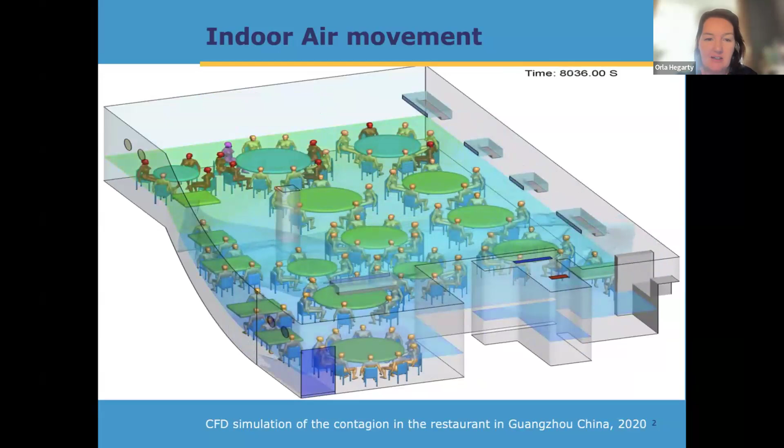This is an image simulation from a restaurant in China in 2020, where they tracked the people here, who you can see in red, who were infected with COVID during the course of this lunch. You'll see they're much more than 2 meters from the person who infected them. And it was modeled using the ventilation system and the air handling system in the building to track what the air movement would have been. And it mapped very closely with the people who were infected. So the first point I wanted to get across is that that is how air is moving.

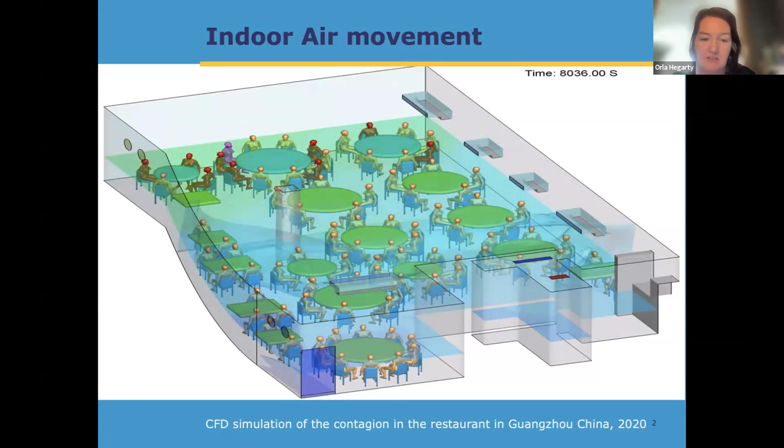This looks a little bit like a classroom as well as a restaurant. And so the issues around air quality, air movement, infection, pollutants in classrooms is much more than about proximity. It's about the air in the entire space and how often that is filtered or refreshed.

So apart from it being not a vacuum, air is more a soup, and it's a soup that we swim in all the time. If we think about a fish tank, it maybe gives us a better idea of what we breathe and what we move around in. We all know that if you don't refresh the water in a fish tank by replacing it with clean water, or you don't filter the water to remove things that are contaminating it, you very quickly will get cloudy water and you'll probably get diseased fish. So we understand that because we see it visually.

We can see the water becoming cloudy and dirty, but in indoor environments, we don't see that. We don't feel it, and humans are actually quite poor at perceiving that. Unless the air is maybe very warm or very humid, and we start to say it's stuffy or there are smells, we don't really perceive it. And particularly if we're in an air-conditioned environment where the humidity is being reduced and the air is being cooled, we perceive that as fresh air, and we don't think about what else is in that air.

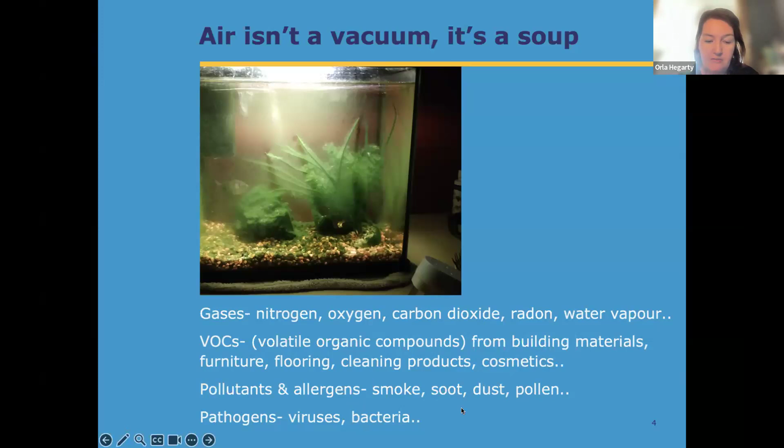And then, of course, we have the issue with disease spread from viruses and bacteria.

So this is nothing new. Buildings have been designed with the idea of adequate ventilation, fresh air and daylight for public health for a very long time. The earliest records I have found of monitoring air quality in schools are from the 1850s in American schoolhouses, when they were collecting indoor air in glass tubes and testing it for the quantity of carbon dioxide. Carbon dioxide has been used as a proxy to see how fresh the air is for nearly 200 years now. If we are exhaling carbon dioxide and it is being retained in the room, it's a good indicator that the air is not fresh, and it's something that's very easily measured.

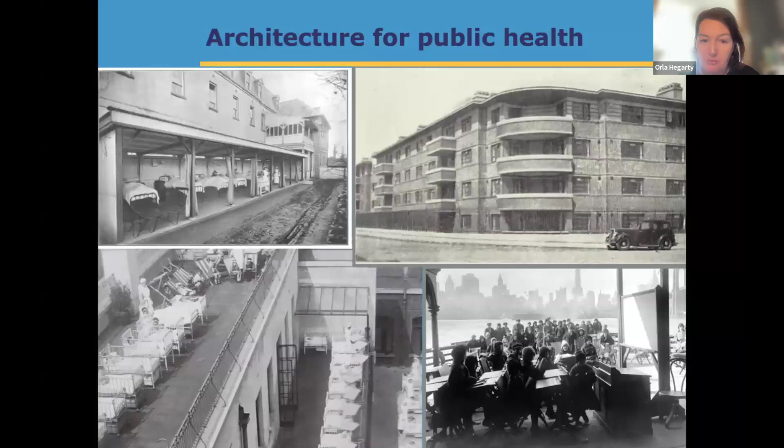This bottom image is from a school in New York during the Spanish flu around 1918-1919, when schools were kept open but moved outside. Even in very cold weather, children attended school, so that parents could go to work and to prevent the spread of illness. Following Spanish flu, there was a whole wave of outdoor school movement in Europe, where children were educated outside, and a lot of that was driven by public health. So it's not new.

But because we don't get extremes of too much bad winter, we don't tend to design our buildings for very cold weather. We tend to design our buildings for the temperate season from late spring until mid-late autumn, when we can naturally ventilate our buildings and they're comfortable. Therefore, we tend not to design for those short winter months when we seal up the buildings, try to retain heat, and have very poor indoor air quality. And that's why we talk about flu season - flu season is just a factor of how we design and manage our buildings.

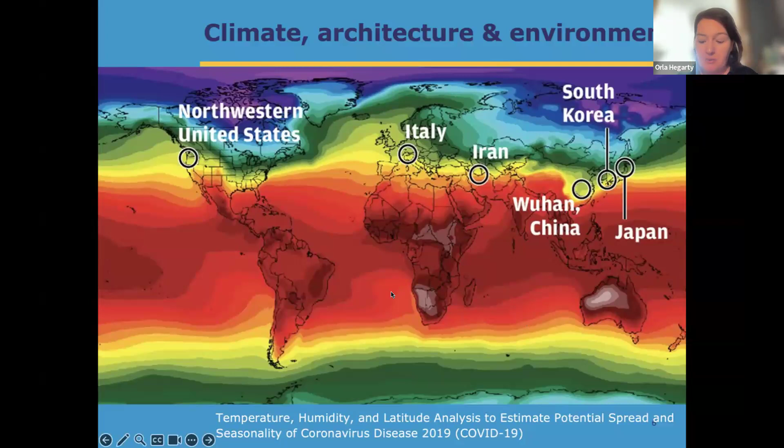Interestingly, six months later, when that yellow zone tipped into southern Australia, it was Melbourne that was badly hit - similar climate conditions, similar building design, similar issues, all measurable, all a factor of the environments that we live in.

If you track the northern United States, you see very high levels in spring and again in the heating season in autumn. But in the southern states, the peak is in summer months, and that's a factor of air conditioning. We now recirculate a lot of air for energy saving, so it feels fresh but isn't actually fresh air, and it can contain a lot of pollutants and pathogens that we don't perceive.

This is also the first airborne pandemic where we've had air conditioning, so the nature of spread has been quite different to, say, Spanish flu or TB. Air conditioning has only been around about 100 years and common in the last 50, particularly in vehicles, which I think is a big issue we're not talking about.

When I talk about climate conditions around the world and the pandemic, relative humidity becomes important, because we often design buildings worrying about high humidity risk, trying to prevent fungus growth and similar problems. But we need to be careful, because going for low humidity can impact human health. In the cold season, when we take outdoor air with high relative humidity and warm it up, it becomes very dry indoor air.

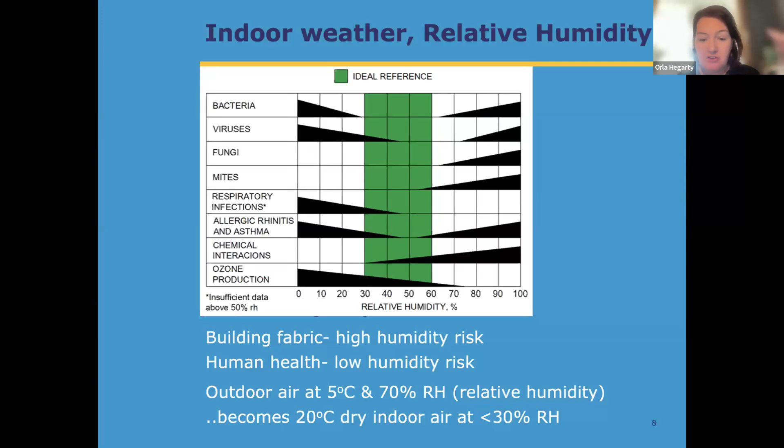This area is regulated, but we need to be careful, particularly since the 1970s oil crisis, because we've changed how we design buildings. All the learning from TB in Ireland's schools, around ventilation, cross ventilation, and high ceilings, has been forgotten over the last 50 years as we've moved toward under-designing buildings since the energy crisis. We've made them smaller with less engineering equipment, and you'll probably find the buildings with the worst indoor air conditions are from the 1980s, a reaction of under-engineering buildings and over-occupying them for cost savings.

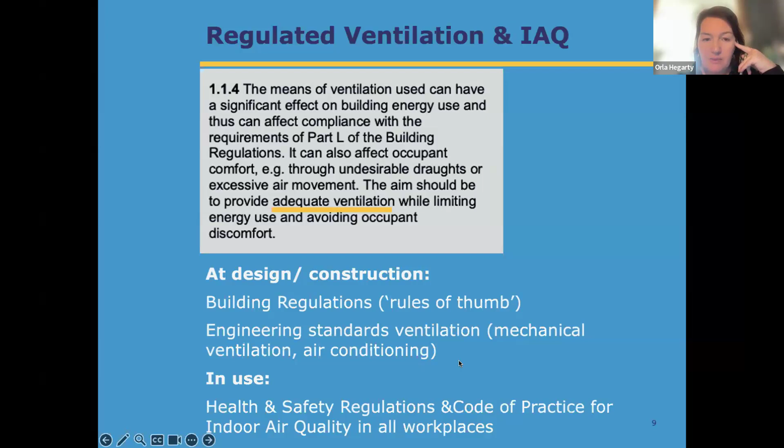So coming to conclusion, I think we need to remember that infection is not inevitable. Infection risk in all buildings can be measured, managed and mitigated. We do not need to be in a situation where we still have disease spread in buildings and vehicles through lack of people's knowledge and lack of monitoring. Public information is incredibly important in this area, because people will manage their own behaviour if they know the risks.

Schools have been particularly at the front line in all of this, because they're high occupancy buildings. Throughout the last 200 years, schools have been designed with the knowledge that they are high risk environments, because children don't just come in and spend an hour in a place of worship, or sit in low occupancy in an office or factory. They sit in high occupancy in these spaces, and stay there for long periods of time. They also tend to be doing activities like singing, talking and shouting, which produces more pathogens into the air.

So schools have always been recognised as core to community public health. There's a statistic from America that shows that in 2020-21, 70% of household infection came home with a child from school. So if you can make sure that schools have conditions of good public health and good air quality, that makes a very significant difference in terms of community public health and disease spread in communities.

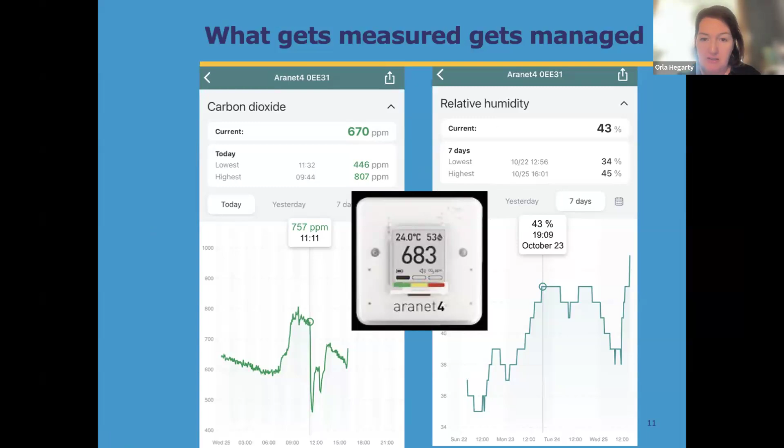And I think from my own measurements and moving around the place, things are not as bad as you might think. And certainly the issues are mostly in certain times of the year when we are cold and we stop ventilating our buildings adequately. So thank you very much. That's the end of my presentation.

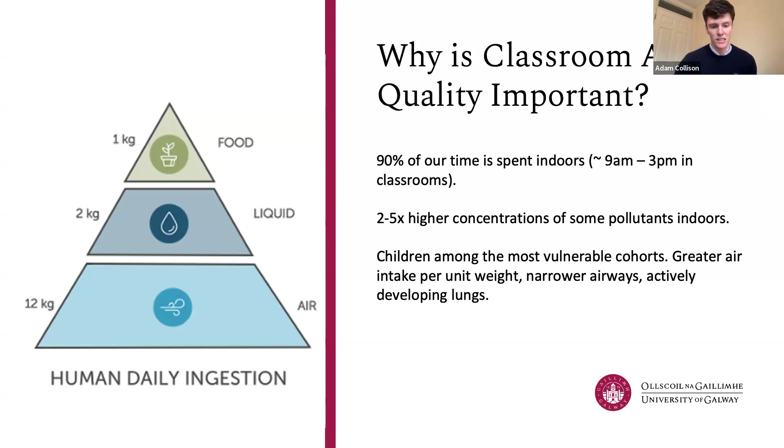So the Benefit Project, which I work on, focuses on 2 specific non-domestic building cohorts. The first group is offices and schools undergoing energy retrofits as part of the SEAI Public Sector Pathfinder program. This is my main research area, but we're also looking at newly energy efficient buildings too, so schools, offices and healthcare facilities. And I suppose why this is important is we all know there's a recognised need to reduce our carbon and greenhouse gas emissions.

The EU has introduced legally binding targets of around 30% in terms of energy efficiency by 2030. And given that buildings are the single largest energy consumer within the EU, accounting for about 40% of total energy consumption and a similar portion of our carbon emissions, addressing this will be an important thing.

But it's even more important, I suppose, given that in 2050, 80% of buildings that will exist already exist today. So retrofitting will play a major part in achieving any of these targets.

Having said that, the negative impacts on indoor air quality have been noted when energy measures are improperly implemented. But how do deep energy retrofits influence indoor air quality? Well, they can in a number of ways.

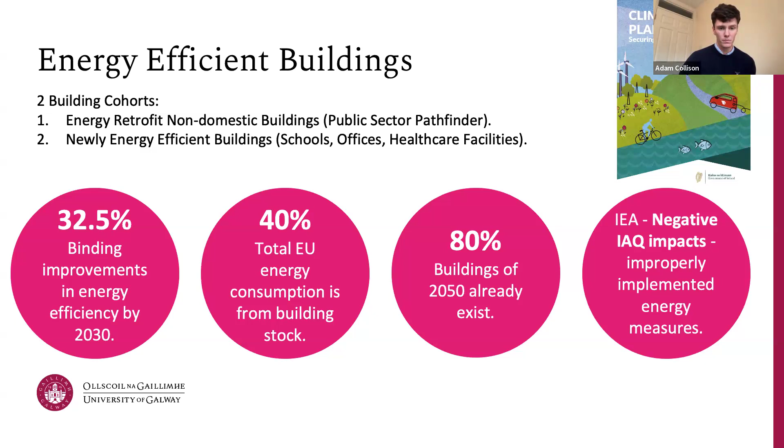But there is a bit of a gap in terms of non-domestic buildings, and more specifically classrooms. So as I mentioned earlier, I'm only going to discuss schools and classrooms today, but this is only a subsection of our project. So a little bit about the schools.

We selected a sample of schools which were very much representative of typical Irish classrooms, and all of these buildings were slated for retrofit. We visited just under 10 schools across the country during the 2023-24 academic year. Our sample was fairly well spread nationwide with a fairly uniform distribution between urban and rural areas. We had 8 primary schools, 1 post-primary school, and the buildings' ages ranged from the mid-1900s right up to the early 2000s.

Occupancy levels in the classrooms were typical, so about 27 to 28 children with an occupant density of about 2 square meters per child, which is actually a little bit more densely occupied than some of our European counterparts. Importantly, all these classrooms, as is common in Ireland, are naturally ventilated, meaning no mechanical units. Ventilation was all through passive means such as trickle vents, air bricks, wall vents, and of course window and door opening.

So we're carrying out a pre-post monitoring campaign, which allows a comparative analysis that enables us to capture the extent to which retrofit measures actually impact indoor air quality. We use research grade equipment to capture precise data on a variety of key air quality parameters of concern over a week-long period.

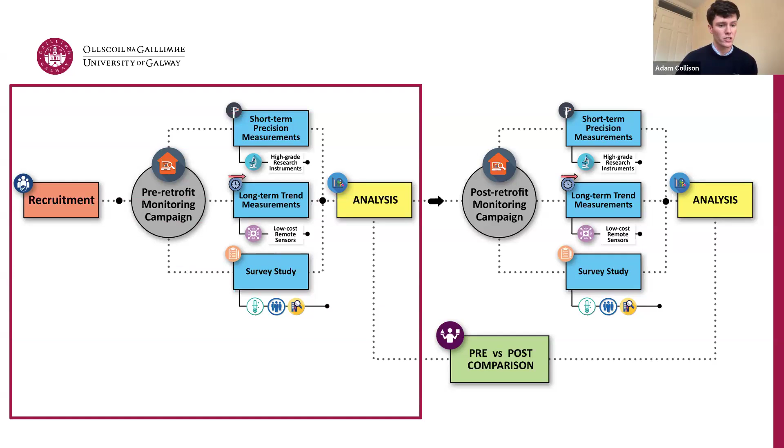And again, this is done both pre and post retrofit. So we've completed our pre-retrofit monitoring campaign and our post retrofit is ongoing. I'll share some of that pre-retrofit data shortly. So we measured quite a lot.

I think the first thing people think about when you talk about classroom air quality is a CO2 monitor, and the consensus at the minute is if you slap up a CO2 monitor, you can call it a day. But the reality of classroom air quality is a bit more nuanced. Yes, CO2 is a useful indicator for ventilation effectiveness and can serve as a proxy for human generated aerosols, but itself isn't actually a pollutant, and we shouldn't really fixate on carbon dioxide readings as a proxy for good overall air quality.

So our study took a broader approach by measuring several key pollutants, and I'll just run through some of the more critical ones very quickly.

Firstly, we monitored indoor particulate matter, airborne particulate matter of 2.5 microns or smaller, PM2.5. These particles are tiny and can get deep into our respiratory system and bloodstream, causing a whole host of health issues. They come from many sources, both indoor and outdoor. Indoor sources might be cooking, candle lighting, or a stove or open fireplace within a home, but those wouldn't be too common in the classroom environment. More problematic in classrooms is ingress of outdoor sources, such as vehicle emissions or solid fuel burning exhaust from chimneys, and also resuspension of settled particles from, say, carpeted floors.

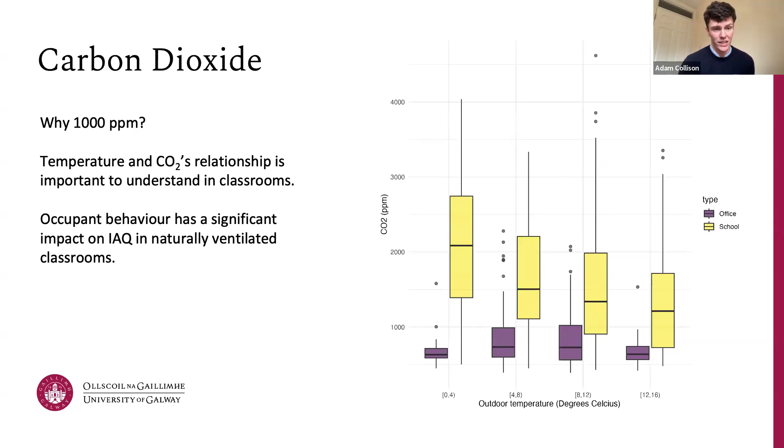So moving on then to PM 2.5. Again, it's another super important pollutant, especially in classrooms. And it poses a significant health risk by itself. It accounts for almost, I think, 60, maybe even more, 66, 67% of the harm from typical indoor air pollutants is just PM 2.5.

And the World Health Organization has guidelines. So the 24-hour guideline value for PM 2.5 is 15 micrograms per cubic meter. And we actually found that this 24-hour guideline value was exceeded on almost half of monitoring days within classrooms in the study. And further investigation by utilising the EPA's outdoor air quality monitoring network in the country, we found a strong positive correlation between outdoor PM 2.5 monitoring stations and classroom PM 2.5. Suggesting, I suppose, that ingress is one of the dominant factors influencing classroom PM concentrations.

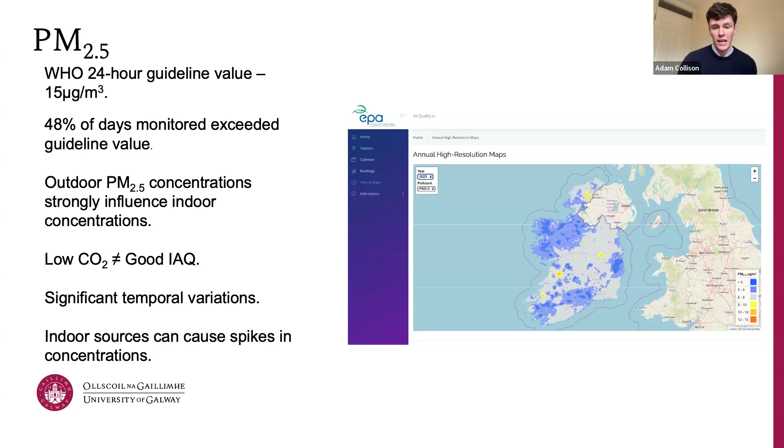And again, PM 2.5, given that the majority of the sources do seem to be outdoors, it's a good example of where low CO2 concentrations doesn't necessarily equate to good overall indoor air quality. So we could have a low CO2 reading because lots of fresh air is coming in, but if that air from outside has plenty of particulates in it, that low CO2 figure might be a bit misleading.

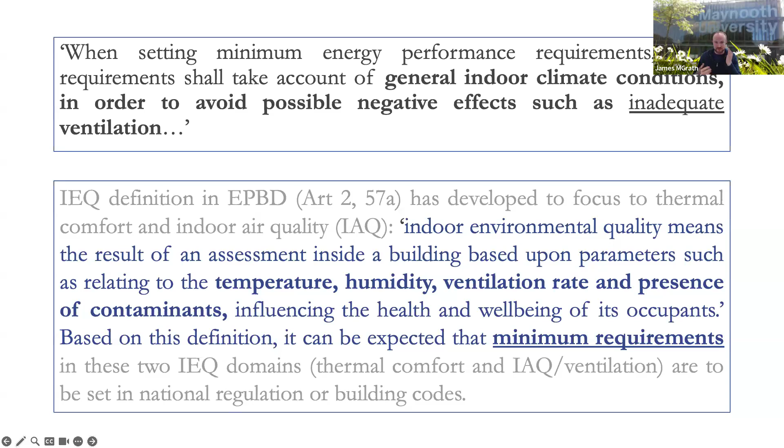But this is really set out more for ensuring minimum requirements and regulations. And if we often look, we see the word adequate, or sometimes inadequate. But I think we need to be looking beyond that. If somebody told me they went to a restaurant and it was adequate, I wouldn't be really keen to go back. Or if the teacher said the children's performance was adequate, as a parent, you'd be slightly concerned. You'd want to be doing better. I think we should be striving to do better, particularly with the indoor environmental quality in these environments.

So when we think of some of the current challenges associated with schools, there's various different requirements and aspects we need to be considering. Some are very much the climate targets and the decarbonisation, energy performance. But we're also now in an era where we can no longer be just looking at mitigation measures. We unfortunately need to start looking at adaptation measures as well. We know our climates are getting warmer due to the buildup of CO2. So we need to start building our schools not just to meet the mitigation requirements, but also adaptation, while also realizing that these are spaces for learning and prioritizing the health and comfort with multifunctional environments.

And particularly, schools have an occupancy of, for primary schools, say 9 to 3, secondary schools 9 to 4. So they're very different occupancy schedules compared to other larger offices and buildings, and particularly the residential environment. And we need to consider these factors as we're developing them.

So if we look at some of the broad evidence to date from an international perspective, we can see that a healthy environment, particularly the indoor air quality and environmental quality, is linked with student absenteeism. We also see when the environmental quality improves, the test scores improve and student learning improves, with increases of between 3 to 6% depending on the studies. Again, Adam touched on this, but the cohort of students, particularly in primary schools, are smaller. So the inhalation to mass ratios are significantly higher compared to adults.

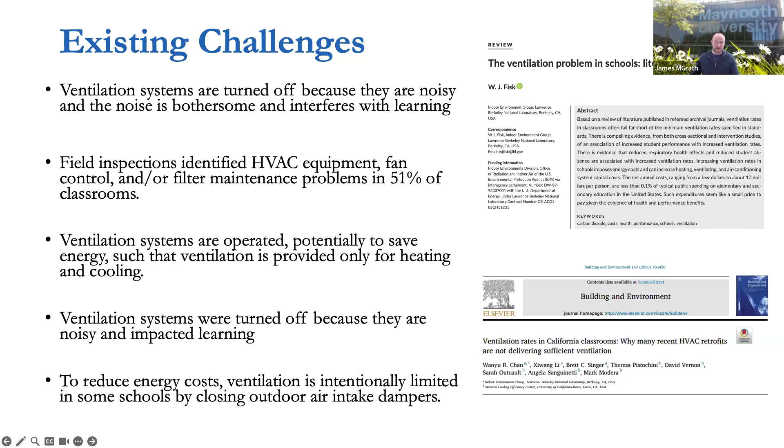So if we look at some of the broader challenges in terms of energy retrofit, we know we're trying to retrofit the entire building stock, and schools and offices are no exception. Adam has already touched on some of the specific targets, but we need to start looking at the climate adaptation measures as well as the mitigation measures.

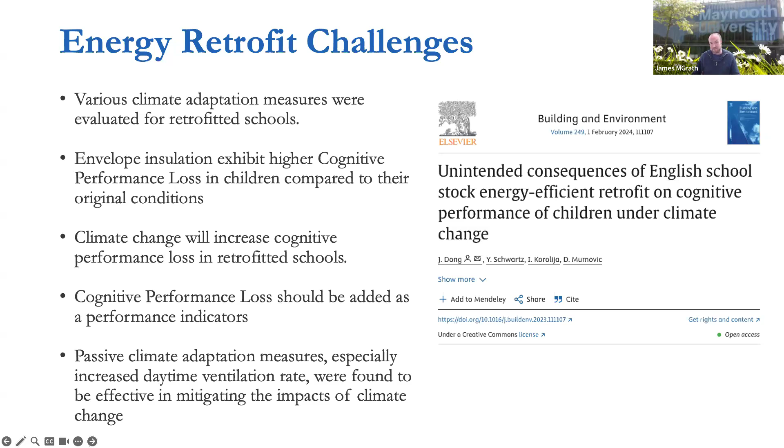And one study that was recently conducted in the UK proposed the idea of including what they referred to as a cognitive performance loss. So how would the school children, or their ability to learn, be impacted as a consequence of these mitigation measures? And they found that in schools where energy retrofitting was taking place, particularly measures to insulate the external envelope, there was actually a negative impact on cognitive performance. But they also found that some of the passive climate adaptation measures, which had a benefit in terms of daytime ventilation rates, were seen to mitigate some of the effects of climate change.

If we consider this specifically in the context of Ireland, in terms of energy retrofits, and Adam has touched on this in terms of the residential stock, we have seen issues where energy retrofitting does lead to negative impacts on indoor air quality. There's always this balance of trying to maintain energy performance versus the indoor air quality aspects, particularly if the ventilation isn't given due consideration as part of the retrofit.

But we also need to be mindful that one size doesn't fit all, and we need to be able to tailor our approach depending on the environment and the location that we're dealing with. And particularly, as Adam touched on, this balance of indoor and outdoor sources, depending on the pollutant sources that we're looking at, means we need to be mindful of different aspects.

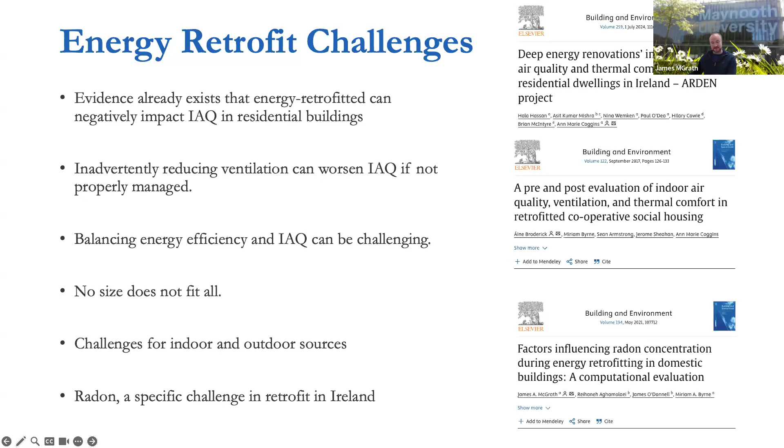And particularly in Ireland, radon is a specific challenge. We've seen this from residential studies, but it's also been extensively reported in schools. In Ireland, all the schools were measured back in the late 90s. So we need to be mindful of when those mitigations were put in place, and how the energy retrofit is going to impact these aspects.

But one of the interesting studies that's come out of Paul O'Sullivan's group in MTU looked at thermal resilience and the idea of what can be referred to as passive cooling or ventilative cooling, which is the idea of natural ventilation. And they found that natural ventilation was able to address the variability, to maintain indoor air quality when we have varying outdoor air temperatures, and in particular, that it was able to adjust to the risks of overheating due to the changing climate.

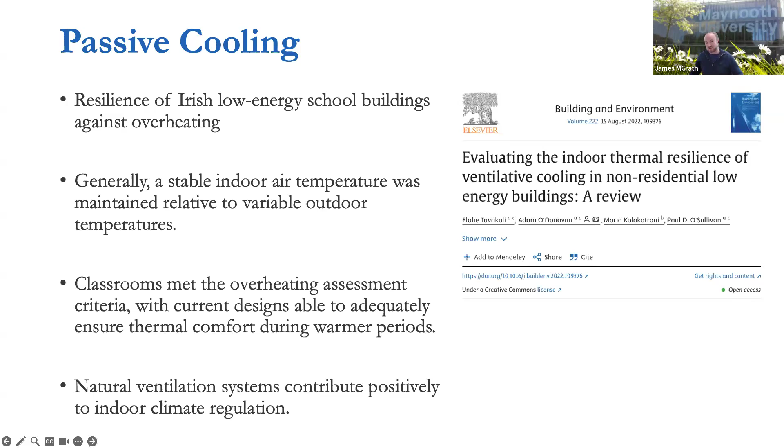So as we continue on and consider developing broader indoor environmental quality management strategies, there are some broad aspects that we need to consider, and some of these have already been touched on.

But really, we would always say the first way to address indoor air pollution is to try and remove it at source. So if we talk about radon, it's to have appropriate radon mitigation measures in place. If we're talking about VOCs, it's essentially to try go for low emitting VOC materials, and to remove any of the specific sources that are generating specific pollutants.

If we talk about humidity, again this has already been mentioned, but really localized extraction is a key priority. Particularly in schools, it's kind of the bathroom areas, particularly now as they seem to be moving more within a classroom environment as opposed to broader centralized facilities. So odor and other aspects can start to become an issue we need to be mindful of, particularly controlled combustion, whether it's candles, incense, obviously cooking less so, but depending on the environment and the scale of the school, at secondary school levels there could still be centralized cooking facilities.

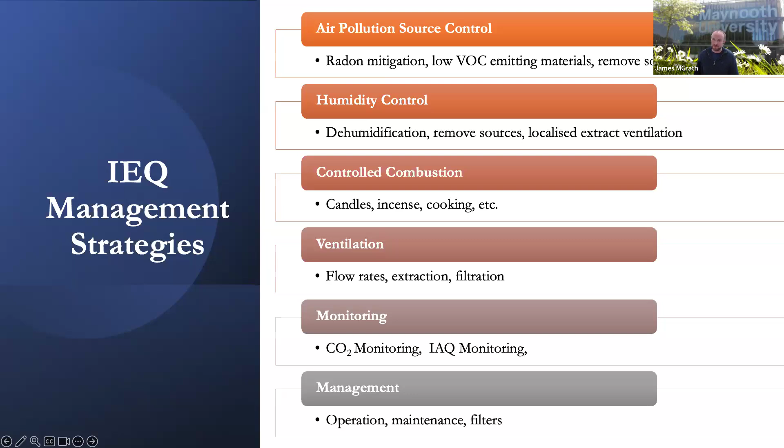Ventilation, then we need to be mindful of the flow rates, the extraction rates, and particularly filtration. Monitoring, we need to be conscious of the CO2 measures associated with them, but also, as Adam has highlighted, we need to be able to go beyond CO2 and look at the broader indoor air quality metrics. And then we need to be mindful of the operational maintenance and particularly the filters used with these systems.

So if we were to briefly look at some of the pros and cons of different ventilation strategies, we talked briefly about natural ventilation. It's very cost effective, it's sustainable, there's a very low carbon footprint associated with the design of it. If we talk about the life cycle assessment of buildings, occupants can typically engage with it - they're quite comfortable with opening a window. There's opportunities for passive cooling, and there's not a lot of maintenance associated with it.

But then some of the downsides: there's variable flow rates, we have limited control, it can have drafts, there can be security issues depending on the environment. But then I suppose there's no filtration associated, and we can't control the infiltration of outdoor air indoors.

We look at this with the advantage then of more mechanical systems. We can particularly get a constant flow rate, which could be required for higher occupancy. It can have advantages for energy efficiency, but again we need to be mindful of this, particularly in the duration of the occupancy and the operational periods that we're considering.

It does have the advantages of filtration, which I mentioned, but some of the downsides - and we've seen this from residential studies, but even the studies in the US - there can be failures in the system that people don't know about that can result in faults. Noise can be a particular issue, but then the long-term maintenance is something that's a particular challenge as well.

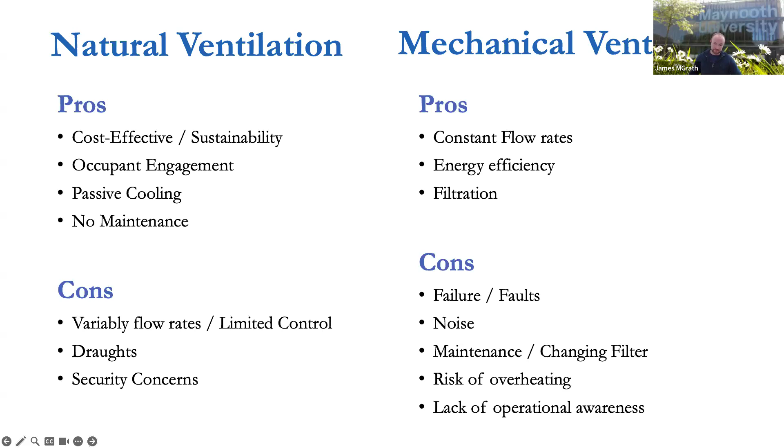And if we just touch on the health and safety code of practice, which Orla had mentioned, we can see within these it's quite useful that there are these kind of CO2 standards now that can be referred to. The UK has similar values. There's the 1000 ppm, which comes from ASHRAE, which Adam mentioned. But I think we also need to be mindful that if we're dealing with a classroom of 5-year-olds versus a classroom of 17-year-olds, the exhalation of CO2 rate is going to vary because of their metabolic rate. So while these CO2 measures are very useful, we also need to ensure we use them within the proper context.

There's some advantages then. If we talk about filtration, we can use filters to clean and remove some of the particulate pollutants, but it can also be used for some of the chemical and biological pollutants. But we just need to be mindful that a lot of the standard MERV filters, particularly used internationally, are around the 7 to 8 MERV rating, which wouldn't capture the particles that Adam has presented in some of his research. So we really need to ensure that if we're looking at filtration as an avenue, we also need to be ensuring that the appropriate filters are going in and that they're maintained.

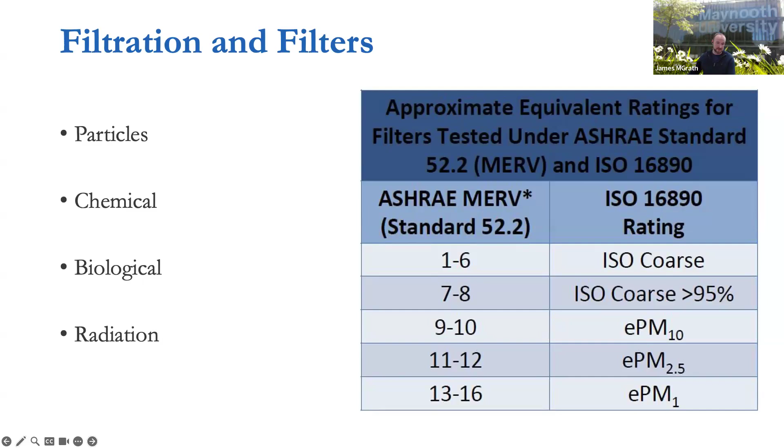But unfortunately, the issue becomes even more complex when we look at the broader avenues. So one aspect of work that was done, led by colleagues in DTU in Denmark, was looking at the idea of TAIL, which refers to the thermal, the acoustic environments, the indoor air quality, and the visual environments.

Some of the challenges can be that thermal comfort can impact indoor air quality. We've seen this from Adam's work, where outdoor temperature will impact how often people want to open the windows. Acoustics and light can have an impact on both the thermal environment, but also the generation of ozone indoors. Acoustics and thermal can have different interrelationships between outdoor noise and infiltration. The thermal aspect can be influenced by lighting, particularly if there's large windows, you can get increased temperatures. Similarly, acoustics can actually impact air quality, where people are turning off ventilation systems because of noise.

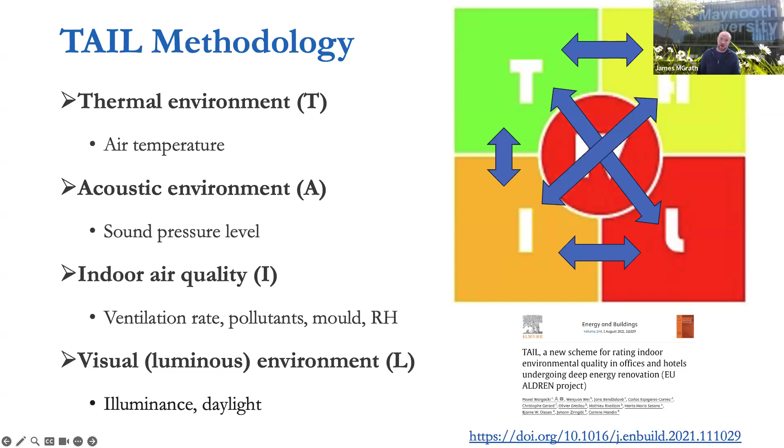So there's quite an interrelationship between these factors that we need to consider.

The idea of CO2 monitoring has been used, so I won't dwell on it. But I think what we need to consider is, if we think of buildings having energy standards from an international perspective, some of these are starting to include broader indoor air quality metrics. Schools now have the Green Flag Award for things like recycling and sustainable initiatives, but we should be looking towards a certification where we can actually say, yes, this is a broad, healthy school.

One of the challenges with these things, and why they've been used quite extensively over COVID, is really trying to maintain that engagement. Particularly with teachers, there was an element of fatigue that crept in. So there was a struggle to keep engagement with these.

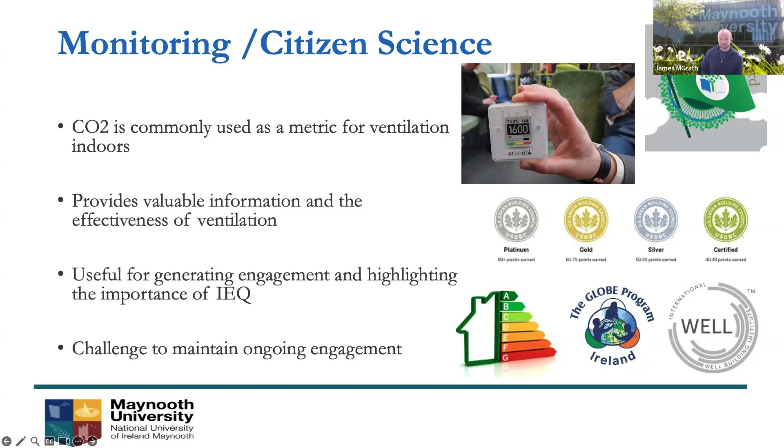Just lastly, to touch on one of the projects, Adam is the PhD student on one of these, and I'm still involved. One of the aspects we're looking at is trying to engage newly constructed energy efficient buildings with these broader aspects. Adam is looking at the pre-post retrofit. We have a postdoc in Galway looking at newly constructed buildings to see how to compare.